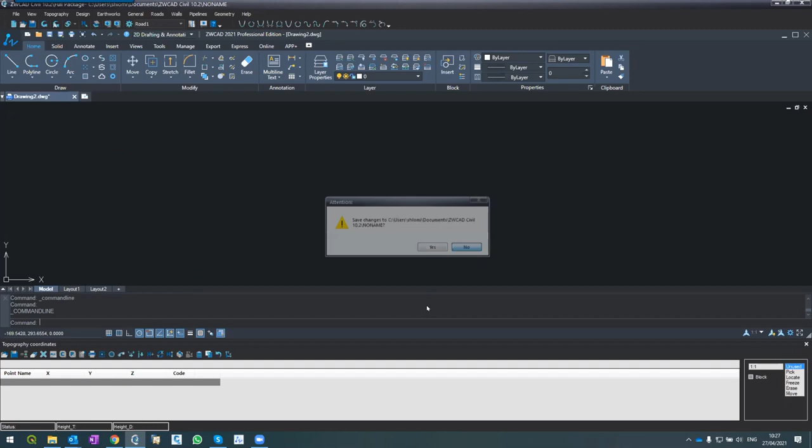So the last training was about roads design. What we did, we started with a new project. Then in documents, we went into ZWCAD Civil 10, we went into samples, and then we went to sample 7. Sorry - okay, new project. We opened a new project, it's my mistake.

I opened a new folder and I will call it Roads Design 2. Inside the folder, I opened the project. Then we have our own project. We've loaded a coordinates file - we do it here on the lower left button, we load the file of coordinates.

What I did, I went into ZWCAD Civil 10, which sits in your documents, go to samples, go into sample 7, and read the file named sample 7 TCO, which is a coordinate file. Now I've gotten it here in the list. To see it, I press the refresh button, it's here on the top left. And I've gotten my map.

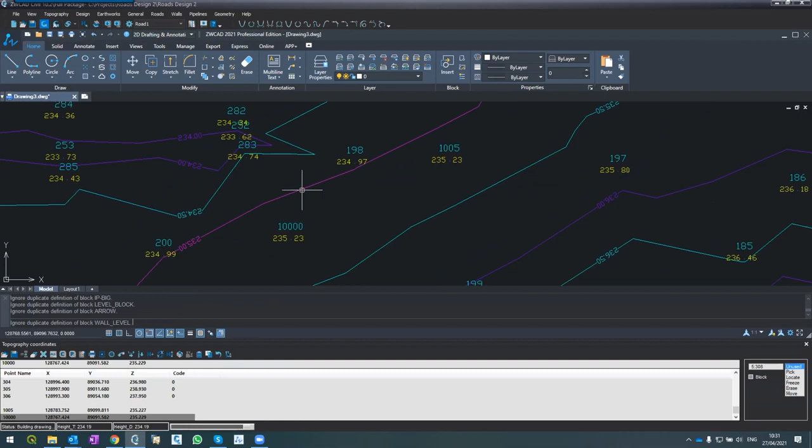Any questions so far? I think this is quite simple. Let me continue, please bear with me.

Now it goes to roads. Every road starts with the horizontal alignment, which means the layout, how the road goes, the alignment of the road. In fact, all of us know that the best road is a straight line connecting from point A to point B. So for example, if I want to create a road that goes from this point to this point...

Let me open a new layer and call it center line. It can have any name you want, I chose center line because we call center line to the center of the road, what describes the center of the road. I'll give it a color, red, or you know what, yellow, and I'll make it the current layer.

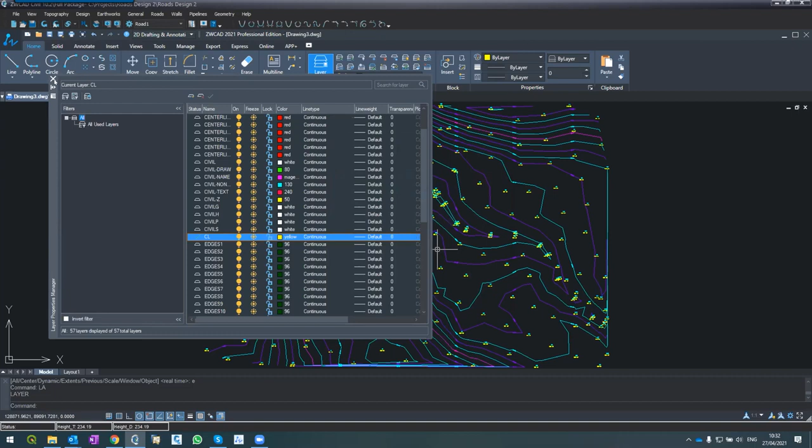If I want to connect this point to this point, I can do a straight line, right? So how do I do it? I do a polyline, standard polyline in AutoCAD, or ZWCAD, from here to here. Obviously, if I want to connect these two sides, this is the best road because it's the fastest.

But maybe Jimmy, can you tell me what is the problem with this road? Why shouldn't I go this way? Or what can be the problem with such a road? Any idea, Jimmy? No idea? Anyone else?

Probably the cut and fill. Exactly, thank you very much. Who was it, Nilo? Yeah, Nilo. Yes, thank you Nilo. Exactly, this is the problem.

Because if I go straight like this, this is only the center line. Now the road will go wider, like 5 meters here plus 3.5 meters like this and 1.5 meters, and then I will start cut and fill here. You see, there are contour lines here, there's a small hill here.

And that's a problem. Now it depends, we can still go by this road, but it means we are cutting here. Or I can change my road and do another one. Let's connect another one that goes from here to here to here.

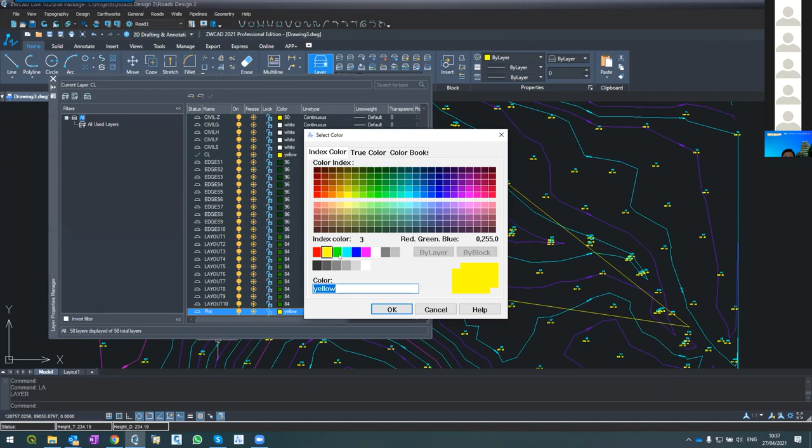Okay, I want to go in a straight line, but there is a house here, and plots of private people here. So if I go through their plot, they will not allow me, or they will ask for big compensation.

Usually in many countries, the law does not allow owners to prevent roads going through their location, depending on physical planning. But if you go through a private property, then you have to pay compensation, and the government pays it. This makes the project more expensive, and affects statutory design. We have to redesign and come to a settlement with the owners, but we are going through their plots, and this can also affect things.

So I'm just giving you several examples of what can affect our road alignment. We talked about natural behavior, like earthworks and the effect on the environment. Parks and nature can affect it too - for example, if there's a national park here, maybe it will not allow us to go through it. Private lands, other obstacles, maybe there's a big monument here which nobody will allow us to move. Drainage, and so on and so forth. So all this affects our alignment.

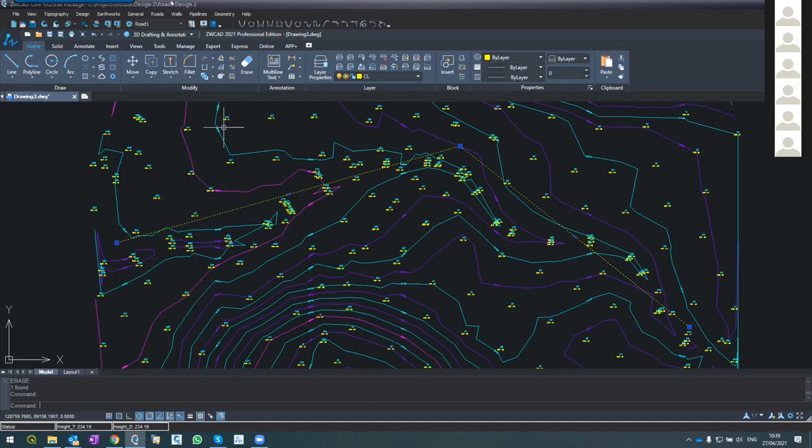So just for our example, let me design my road this way. What I did, I created a polyline, but for now it's just a simple 2D polyline. To convert it into a road, I'm going to roads, horizontal alignment.

See what happened - first of all, the list below changed from topography to design. It says design coordinates, and I can flip between them. Go into topography, I see the topography. Go into design, I see the design. So I can flip between topography and design coordinates. On the right hand, I see the horizontal alignment window where I can define my road.

He asked me, what is the first road, road 1? I'm picking select on the right. See what happened in the command line - it asks to enter an option, polyline or segments. We will use polyline because we have a polyline here, so I press enter for the polyline. It asks me to select the object - I select the object, one object found, press enter.

See what happened now - the 3 coordinates that define this road, the first, second, and third, we call them IPs, intersection points. They appear both here with coordinates and description of the road, IP 0, 1, and 2. If I press apply, we'll see the system actually converted this - press apply, OK again.

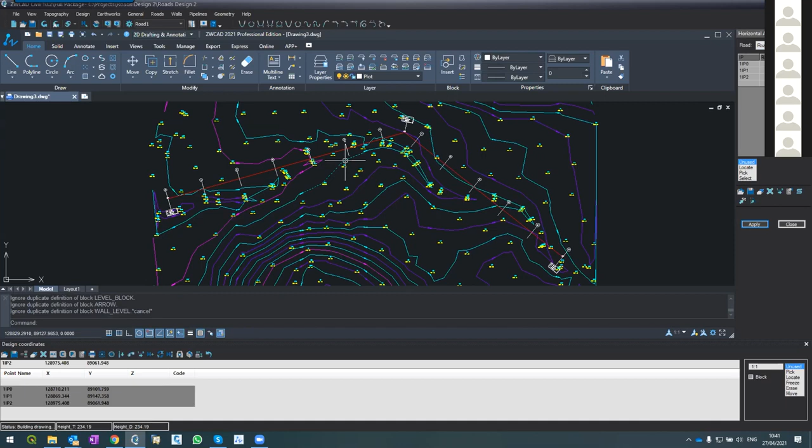This is now a road model or road element. I don't know if you're familiar with the term BIM, building information modeling, but this is exactly what we're talking about when we talk about BIM. This polyline is not anymore a polyline - it's a BIM model, a 3D BIM model.

For now, it only includes the road, but only includes the horizontal alignment. It's not in 3D yet, but it's already a model. It's a model, it's a road. We can see the coordinates of the road, and we can see the cross sections of the road, 0, 1, 2.

By the way, if I press apply again and tell the software to show me the distances, it will show me the distance between cross sections. Let's see - so 25, 25. So this is already a BIM model of the road.

For now, it only has the horizontal alignment. These are the coordinates. Now we know, of course, that if a car goes from here, unless this is a junction, it has to turn here. So either we put a junction here or we just put a radius. Let's put a radius of, let's try, 150 meters. So how do I do it?

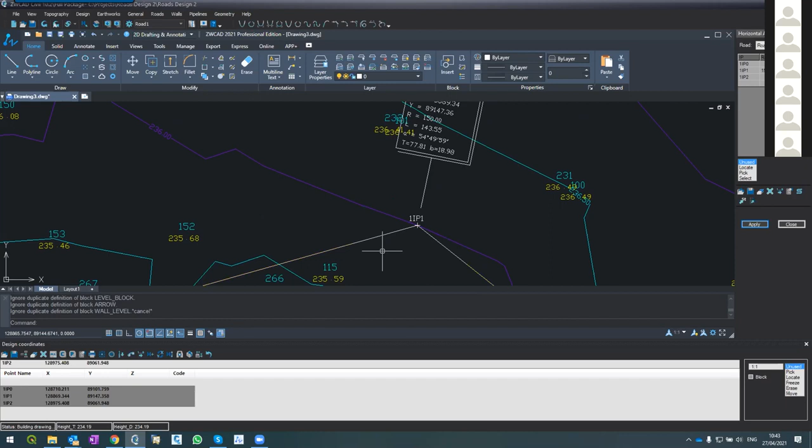See what happened - automatically the system used the 150 meter radius and changed the road accordingly. The starting point of the radius we call the tangent point, between this straight line and this radius. The software calculated it to be here - it took the 150 meters, found how to fit it, and came up with this tangent point.

So from here we are starting - if you're driving a car, next time you'll notice when you drive, this is straight, and when you're going into the radius or turning right a little bit, this is the starting point. From here, what will happen? I don't know - Sheena, can you assume what will happen to the car starting from the radius? What will we feel? Any idea?

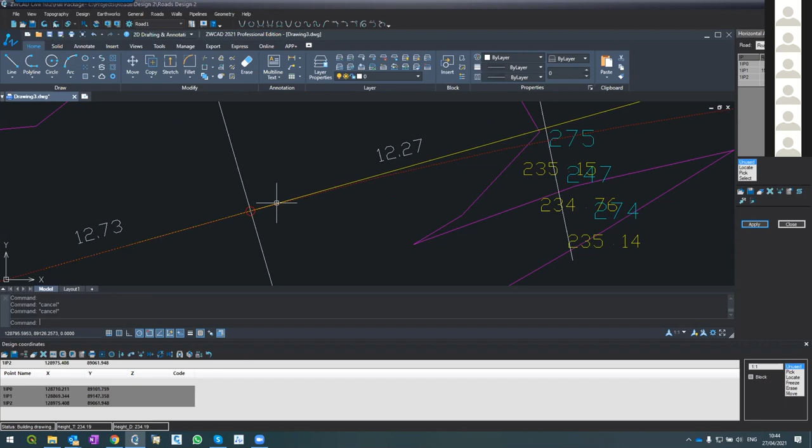Super elevation will be the implication, but what we feel is the centrifugal force - sorry, I said gravity, it's centrifugal force, my mistake. Centrifugal force on the car, out of the circle, out of the radius.

So if the car drives like this, starts turning right. For example, let me show you something. This is my car, right? So if this car is driving here, it drives like this, in this direction.

When it starts turning right here, there would be a force which will go this direction. It will start feeling the radius. The faster it goes, the bigger the radius - bigger radius, lower force.

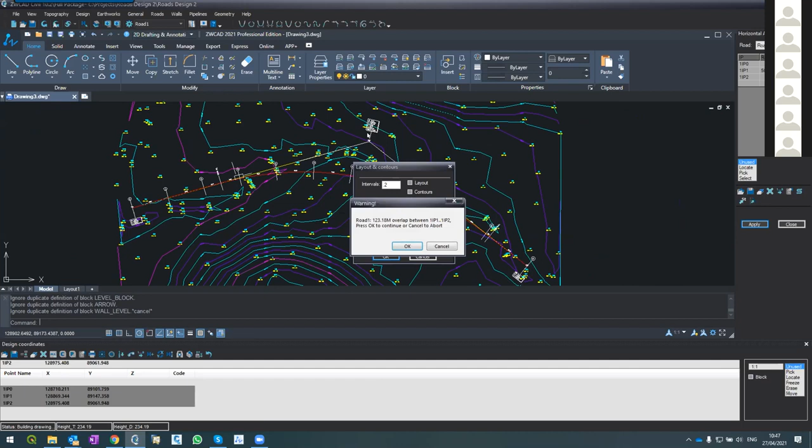Road 1, there is an overlap. When I do 500 meters, it's too big. There's an overlap between this IP and this IP, and this IP and this IP. You'll see it in a minute. There's no geometric solution, so the system alerted - see what will happen. You see? This is 500 meters. There's an overlap, so we cannot use it.

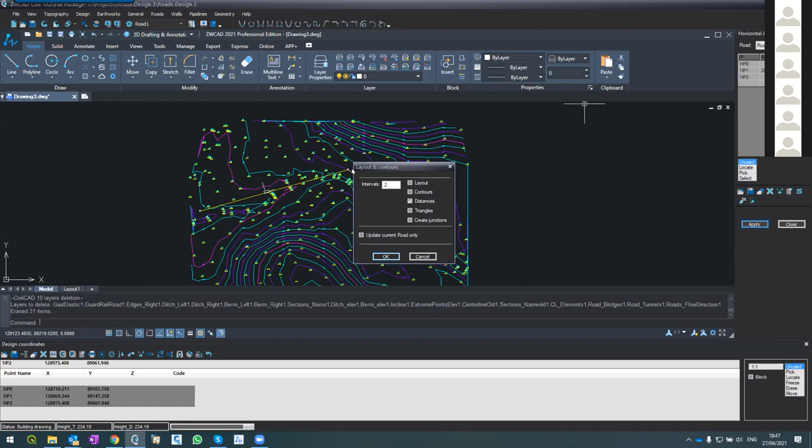So I will go back to 200 meters, and that means the speed limit here would be maybe 70 kilometers per hour, depending on which standard we use. Okay, so I use 200. About super elevation, we'll talk about it in this lesson. Super elevation is the way to compensate for the centrifugal force by entering a crossing slope, but we'll see it very soon. I hope what I explained is clear.

So in very short, when I click select here, select the polyline and press enter, I converted it into a beam - for now, a beam with horizontal alignment only. That means the data shows here, and that means I can enter radius and change the radius of the road. This is what it means. By the way, I have some additional information which I can enter here.

We call it transition curves, or in other words, clothoids. This is more likely to be shown in highways, where the speed is very fast, and therefore a car going this direction at 120 kilometers per hour - at this point, immediately the centrifugal force will be in full force on the car. So the effect on the driver would be fast and strong.

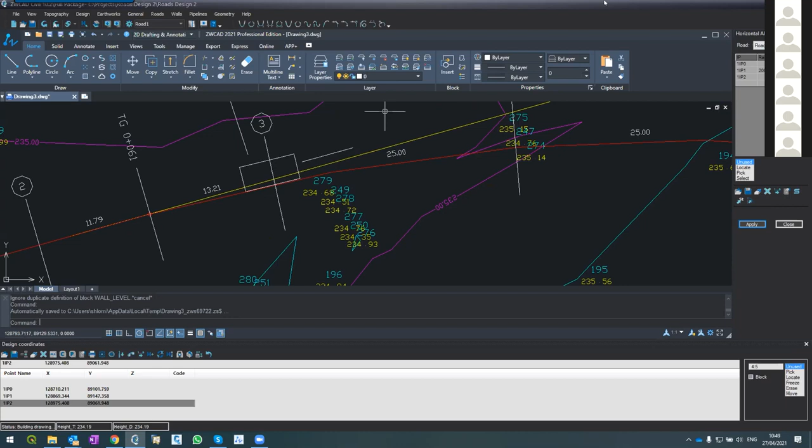So usually we smooth the transition. For example, I can enter what we call a 40-meter transition here. Let's see if there's a geometric solution for it. Let's see it. Otherwise, something will alert - you see what happened? Instead of tangent, we have what we call a transition curve, a transition spiral. This is now not a regular curve, we call it spiral, or also called a clothoid. Clothoid is a geometric solution of a transition

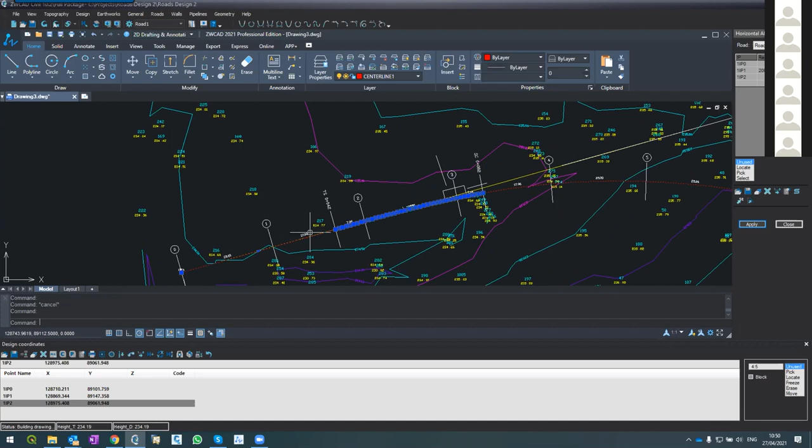between this point and this point. We are transitioning the curve from here to here. What's so unique about this element is that the radius here is 0, or infinity if you like - it's the same, so there's no centrifugal force. Here it starts changing - at each point like this, the radius is getting bigger. Here it will be 200, here it will be 0. The clothoid geometric definition is that it's transiting slowly, gradually from 0 to 200. So the driver will feel here the change will not be that dramatic. This is why we create transition curves.

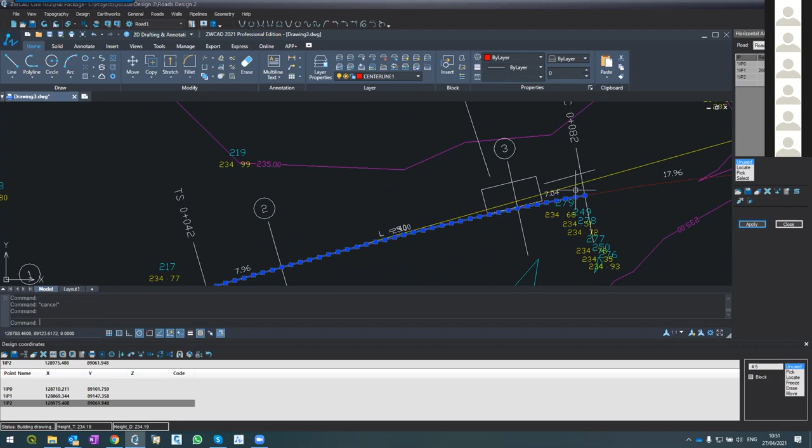I hope you got it. What the software shows you is that the TS is the tangent from here to the spiral, and here from the spiral into the curve. And here again, usually when we do a transition, we do the same when we are going this way, so I'll put 40 here as well and press apply.

Now I'll get the same thing here. Okay, so I have a spiral from here to here. I hope this is clear. Any question about this one?

Any questions about this one? No questions, I assume the silence is no question. Nilo, can you follow? Yes. Hatik, can you follow? Hatike, my question is, can I? Hello, yes, I can follow. Okay, who asked the question? Jimmy, yes, please Jimmy.

We can still design our road without transition curve, right? If we are following only the radius without the transition values. Of course we can, but it has implications, depending on the speed limit on the road. If the road is an urban road with slow speed, let's say 80 km/h, then usually we don't use it. Depends, we can use it or we cannot use it.

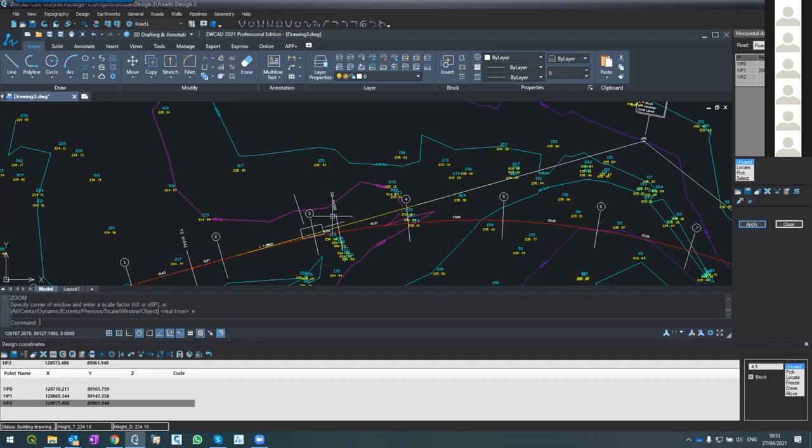The reason for not using transition curve can be some, I can give you some ideas. One is because it's more difficult to construct, because the spiral itself is not a linear definition. Second will be probably because it affects our geometry, and we talked before about the limitation of the geometry. For example, the preference to have a straight line instead of a curve from the first place. So this also limits the geometry. Usually these are two reasons, maybe others, that limit us from putting transition curve, and then we use standard radius.

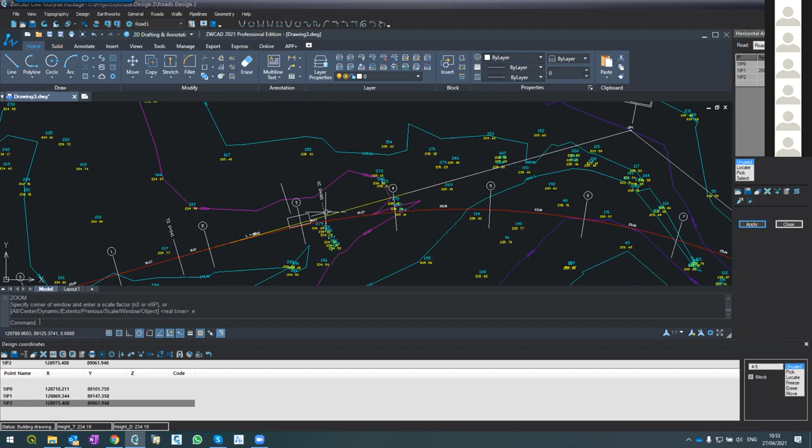But in highways where the speed is very fast and you enter the radius again, for example if this will be a curve and this is a highway with a speed limit of 120 km/h, usually we put a transition curve. But if the radius would be, for example, 5,000, then the centrifugal force on the car will not be that much, so the importance of the transition is not that critical. But again, I'm talking about road design, but I'm trying to limit myself now to the software and not to general civil engineering.

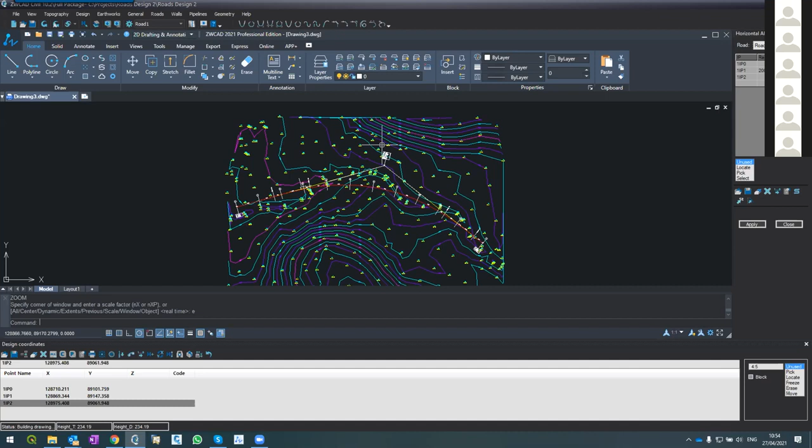More things about the software. First of all, whenever we design the road, the software shows me here more data. It shows me the X, Y coordinate. It shows me the radius. It shows me the length of spiral if I have one. It shows me, I think, what we call L, the length from here to the tangent. I think this distance is what is 150, as far as I remember.

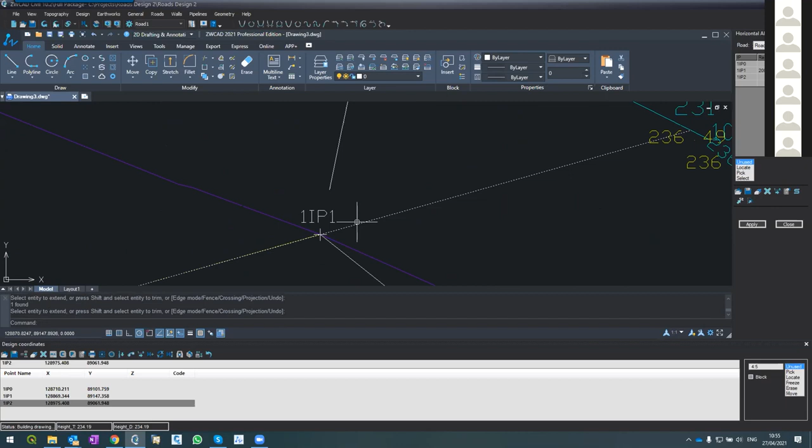And it shows me the transition angle, which is the angle created here. If I would have extended this one, this is the angle, which is the turning angle. So here the angle is 54 degrees. These are data for the road.

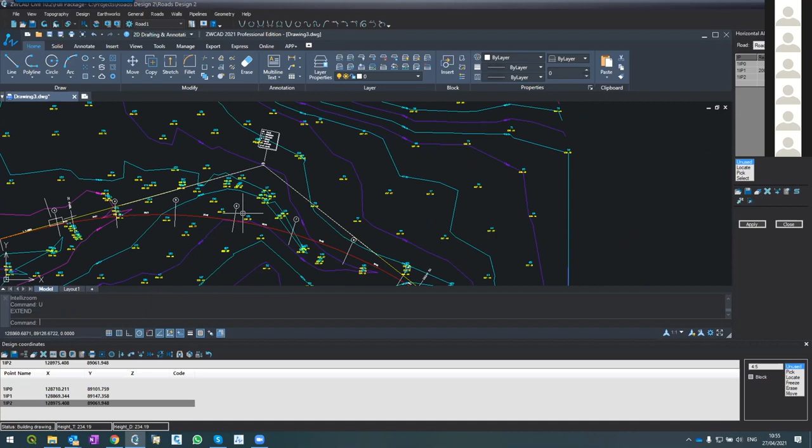What else? If I go to, by the way, it's too much graphic, let me go into layers and go to civil and do like this, so I don't need the points. If I go to options, I have many definitions here. One of them, for example, is to change the display. Instead of having the road 0, 1, 2, 3, 4, if I go here and go to define sections and change this from format 1 to format 2, and press OK, and press OK again and apply...

You can see that now, instead of numbers, I see the running distance of the cross section. So it depends on how you want to show it. See 50, 75, 100, 125, and so on and so forth. It's a matter of how you want to display it. There's no one standard for it.

How do you want to create this road, the center line, as a 2D polyline, like we saw, or a 3D polyline? Advantages are many. 2D elements are easier to cut, trim, everything, but 3D polyline will show me the road in 3D if we change it, so you can change it.

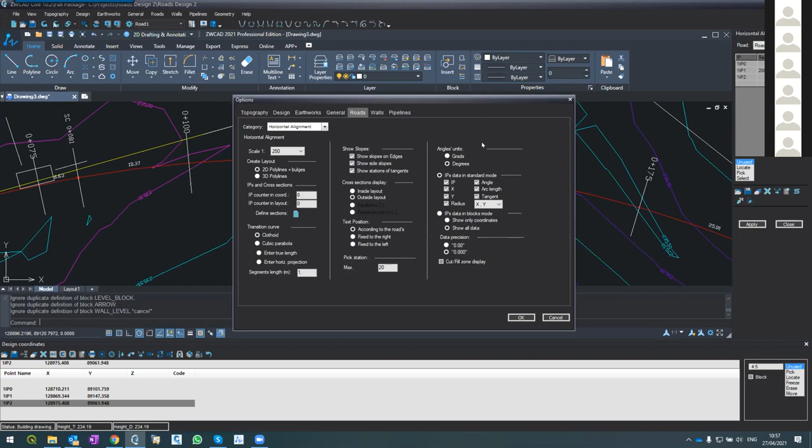You remember the transition, now we're using clothoid. We can also enter cubic parabola. Again, why to use cubic parabola depends on countries and regulations, and so on and so forth. There are many, I'm not gonna talk about all of them, but I think it's important.

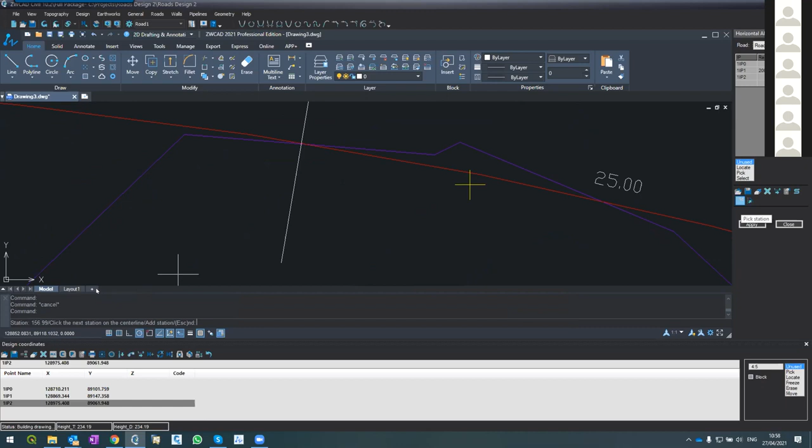Another thing is, for example, this button. I can click this button and click here, and the software shows me that this point, the projection or perpendicular of this point on the road, is at a running distance of 156.99 from the beginning of the road. So if I want to measure the running distance at a specific point, I can click here. This is 115. You see, this is 110, this is 125, this is 115.24. So I have many tricks here.

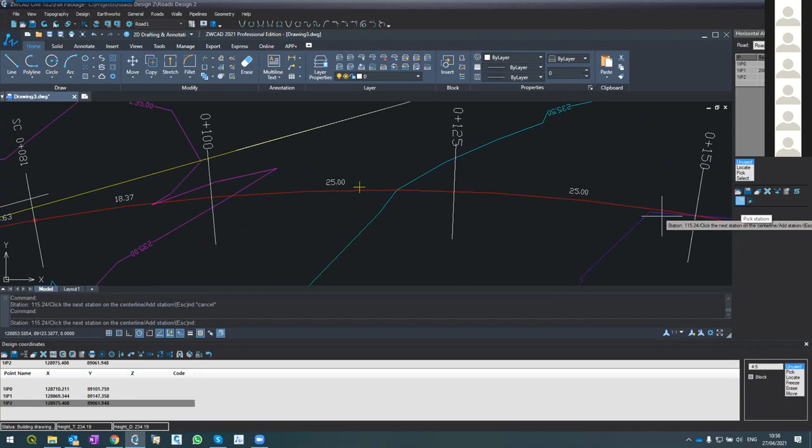It's not that important at this stage.

What was 200, and 40 and 40. Oh, you see what happened? Since the curve is bigger, there's an overlap.

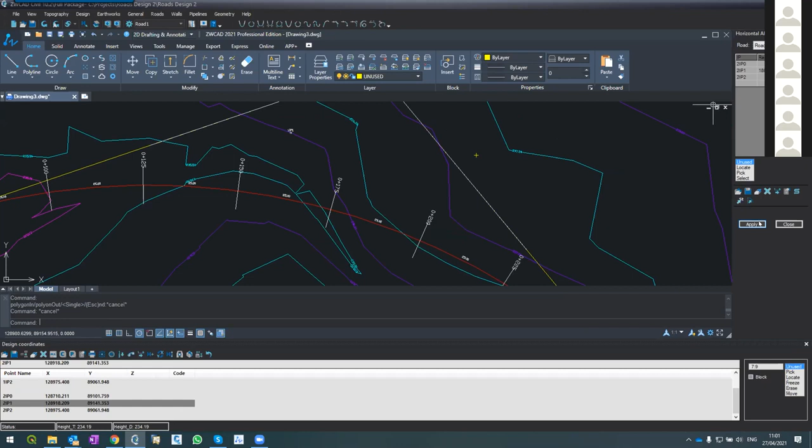The software now recalculates, you see, one IP, and recalculates this IP's coordinates. These IP coordinates change to this location. If I go to the right and press apply, and apply again, automatically the beam has been updated, but again we have the radius, the overlap problem, because this new geometry created new challenges.

We'll fix it in a minute, but just for you to see. See what happened? I changed it to here. I don't need this polyline anymore. Now I'm using move to change the coordinates here, and the beam automatically updates accordingly. See? This is the overlap which we saw.

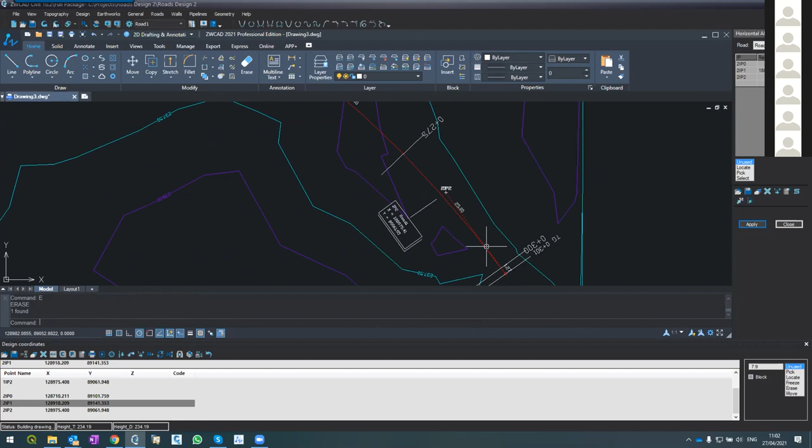So let's change it now to be 150, maybe it will be enough. Let's see, actually the software will tell me. Yeah, it's enough.

Okay, any questions so far, guys? Because I finished with horizontal alignment and I'm moving to the next thing. Sheena, can you follow? Yes. Don't you have any questions? No questions. Okay, okay.

So before I continue, I want all of you to take like 10 minutes and do the same practice. It's very simple, what I want you to do I will write down in the chat. So all of you, one, start a new project and name it road 2. You can put it in a folder, put it in a new folder.

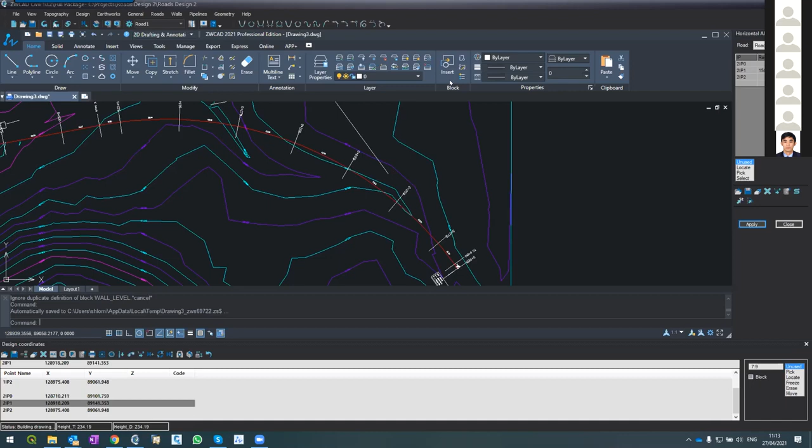Okay guys, I think we should continue. Jimmy, can you share your screen for us to see, to learn? Let me allow you to share your screen. Okay, I'll share. Because all of us should learn, and I want to see it easy on my screen because I'm doing it perfectly.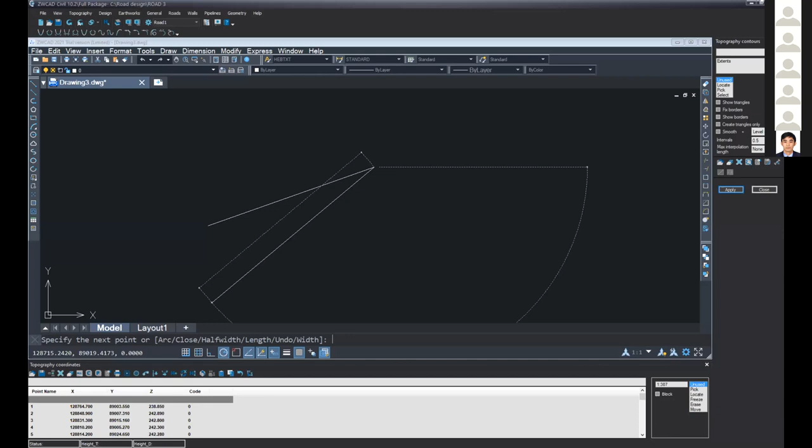Okay, where is your contour line? Where are your contours, contour lines? How to draw the polyline, the road, then it disappears. Okay, one second. Somehow your point disappeared? The contour line, the contour lines. What about your point? Yes, everything.

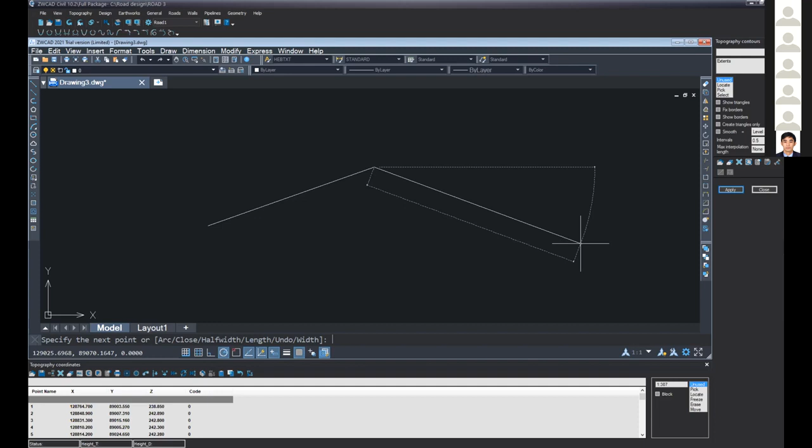Okay, let's do like this. Press escape. Go to one of the points below. Click on it. Yes, now go to the first. You see that the point is now in the editing row. The point itself, yes, above is editing row, no, below? Yes, okay.

You know, go to the end and enter a space, or go to the one and change it, remove the one, and something to show the system that you have done a change. Remove one and enter one again. I've done that, and enter one again. Okay, yes, what you did right now, if you refresh, the system will think that there is a change, and refresh the layer.

Oh, the contour line is back. Okay, yeah, one second, there's a delay, we don't see. Okay, you see what happened? So yes, I don't know why they disappeared, but if you want to make the system refresh or recreate the layer, if you just press refresh, the system will not know you have a problem. So you have to tell the software you changed something in the list and then refresh, and automatically the system knows there is a change in the list. I need to recreate the layers.

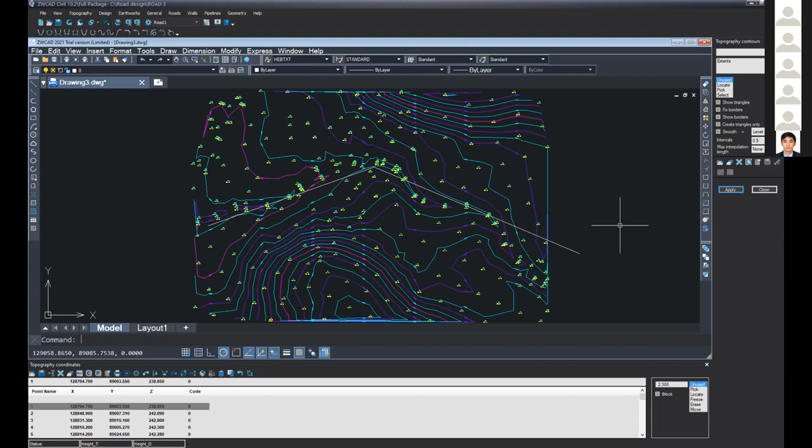Okay, continue with the horizontal alignment. Your horizontal alignment is not so good because you are going out of the contour line. So just fix it and continue.

Maybe we'll learn together. Can you see now? Can you see my screen? Yes, I have already imported the coordinates now. Good, continue, I'm at that position.

But I can't see now. Okay, you see you have the same problem. Yeah, first of all try to zoom extend, first of all. In the command line, zoom to extend. Command line, zoom to extend, you know how to zoom to extend, right? Zoom, yes, enter, E, enter.

E. Excellent, yes, it's Turkish, you know. Turkish, yeah. Just zoom to extend, you know, maybe you do it from the buttons, whatever you want.

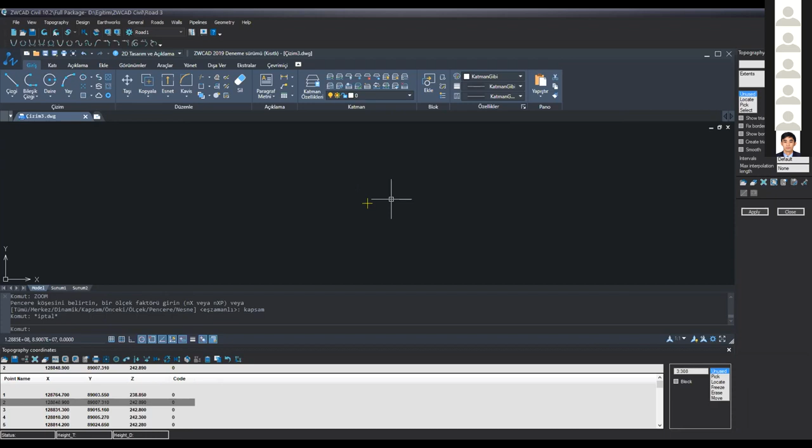Nothing on your points, very strange, very strange. You know what you can do? Maybe, go to number 2 for example in the list below. Yeah, and you see you have a button with a target icon. This one, yes. This is where the point was supposed to be, but it's not showing. Okay, try to create contours, let's see what happens now.

At that point, it's locked. I see, okay, this is one of the things maybe we'll ask our technical team to have a look, because I think it has something to do with the language. I'm almost sure, it's conflicting with the language. So it's something we can sort out, but we need to take control, maybe later on. Okay, yeah, okay, we can take it later. Yeah, is this the first time it's happening, or has it happened to you in the past as well? Yes, in the past I have the same issue lots of times. Okay, okay, it's an issue of the Turkish version, so we'll have a look and sort it out. Okay? Okay, thanks.

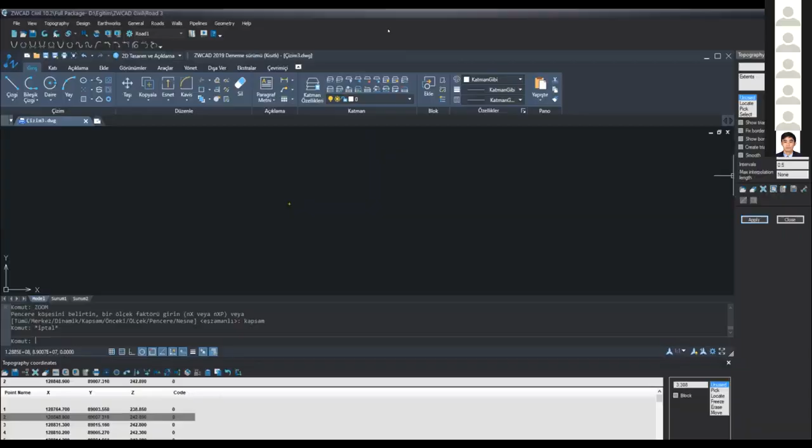What about Nilo? Can you show your screen? Oh, wait.

Can you see my screen now? Oh, nice. So what about the road? Continue with the road.

I'm trying to do the horizontal alignment right now. Yeah, but where's your command line? Why aren't you using the command line?

Okay, do like this. Click somewhere in the drawing, then press escape. Cancel. Now show your command line. Do you know how to do it?

Type in command. Command line, yeah, here it is. No, you saw it in the list. Type command again, you see, pick the first one. It doesn't do anything.

Try to write command line. Still the same. Can you click on the X of the topography coordinates window, the one that you showed before? No, the X, close the window below, the topography coordinates window. Yes, close it.

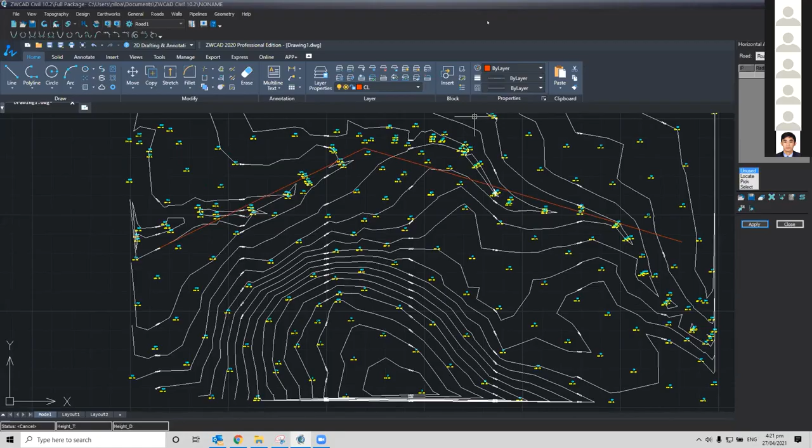Yeah. Sheena, how are you? Yes, hello. Can you share your screen? Okay.

Hi, can you see my screen? One second, I see something. Yes, I can. Oh, perfect. So I think you are okay. Okay, thank you. You didn't encounter any problems? Okay, yes, no.

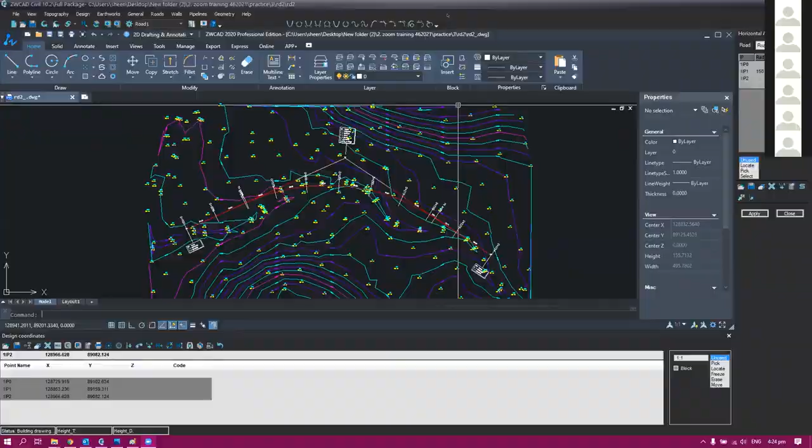Nilo, I think you should use Control+9. Control+9, it's supposed to restore your command line. Wait. Yeah, Control 9. Are you sure your focus is in the drawing? Yep. Because it works on my computer. Control 9, not Control Function 9. Control 9, okay, okay, so it works?

It's been minimized, that's why I can't see it. Yeah, do you want to share? Can you share your screen? I'm sharing my screen now. Okay, good, you have the command line.

Very good. Okay, so go and make the command line a little smaller so it won't take much space. And go to Design, sorry, Roads, Horizontal Alignment. Okay, wait.

Good, then select. Select, right? Yes, select. Then, oh, where's your command line? It disappeared again. Press escape and then Control 9. It's very strange. Did you press Control 9? I did, and the focus now is on the drawing, right? Yes. Now click somewhere in the drawing and press Control 9 again.

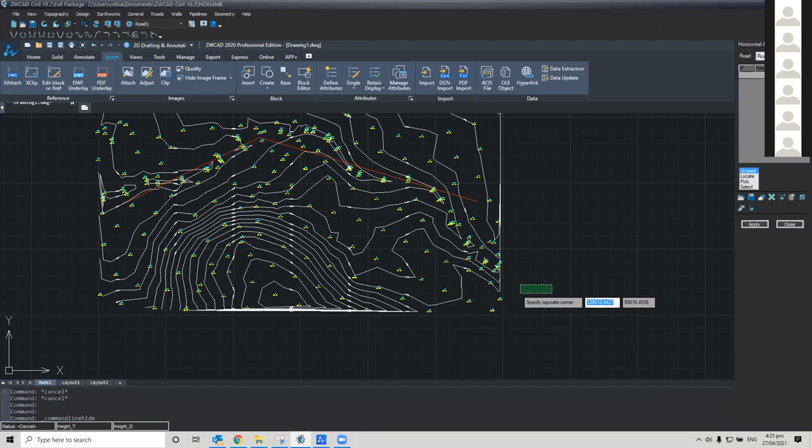I got it. Okay, what you can do is try to close the design coordinates window now. Okay, I see. And just select now, yeah, continue like this. Select, enter, and enter. Good, apply. And mark the distance and press OK.

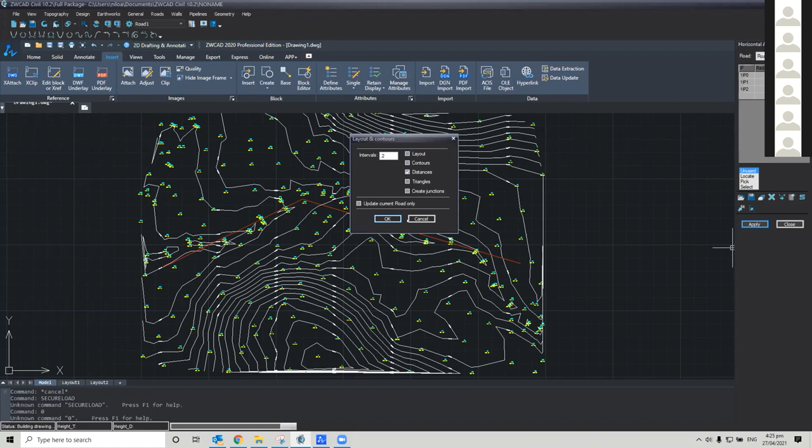Now, what I would advise later on, I think it's something connected with the docking of the command line. So when we finish, try to see how you can dock it. Yeah, okay, it's something about docking the command line somehow. Okay, but if the problem persists, let us know.

Change the entry radius, let's say 100 meters. Then how about this spiral curve? No need. Okay. Hey, there you go, okay good.

This is all right. Go to options and change options. On the right, you have a button, options, the one with the hand holding a paper. Oh, where is it? Yeah, where you are, very close to where you are. Now, first row, and another one to the right, another one to the right, more.

Yeah, okay, and go to Define Sections, you see the button? Define Sections, this one, yes. And change from format 1 to format 2. What's the difference between the, okay. Format 1 is when we see serial number. Format 2 is when we see running distance.

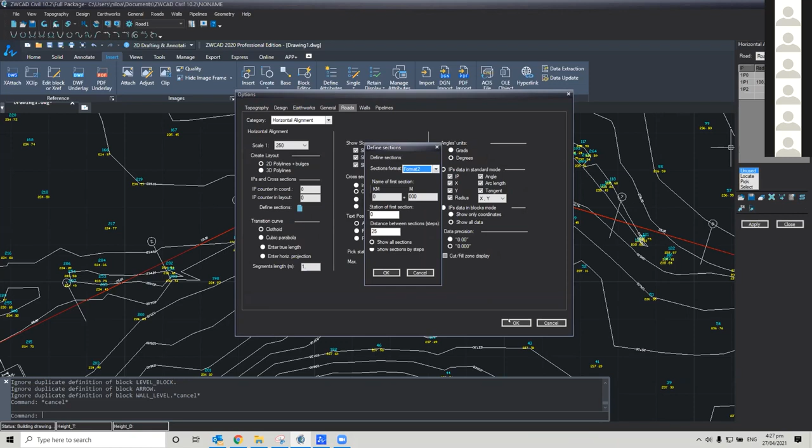Okay, yeah, press OK and apply the change. Apply, yeah, let's see. Good, okay. One of the problems is that you are now working on 'no name' - see on the top, you are in project no name? Yeah, oh okay, it was a mistake. So what you do now is go to File, Save As.

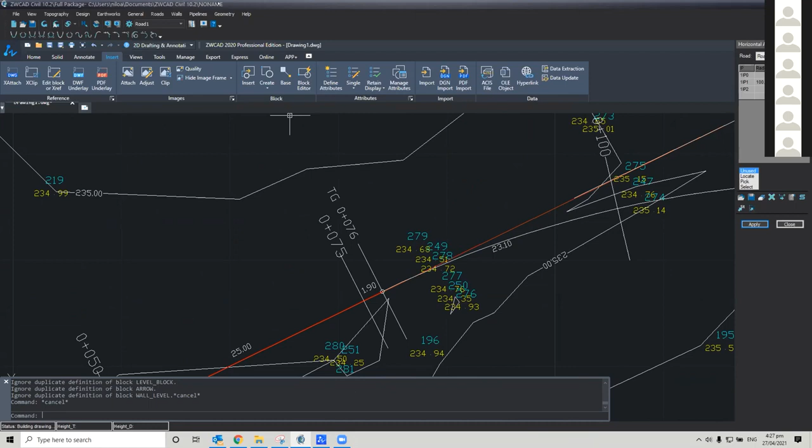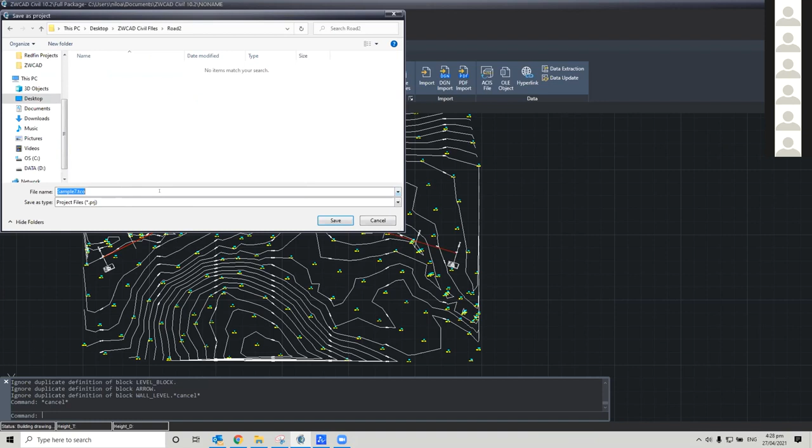Save it somewhere. Road2, usually I create subfolders. Road2, and Road2, and I'll save.

Now all of us are on the same page. You are also on the same page. Gian has the same problem like you with the command line.

What I would advise you to do is two things. First, try to see if you can dock the command line. Second, you can use 2021 if you have it. There shouldn't be any problem. All our training we do with 2021.

So what can happen, maybe, I want to show you something, to remind you. Someone needs to mute. Okay, I want to show you something, to remind you something. Do you see my screen, all of you? Yes, I can see. Okay, thanks.

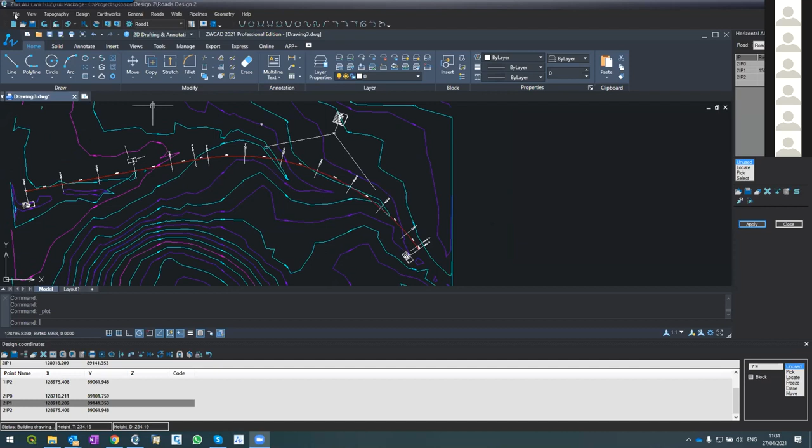If you have two systems installed on your computer, 2020 and 21 for example, and you want to choose which system to use, I want to remind you: go to File, open Prototype. In Prototype, go to File, Configuration. We studied it in the first lesson. Here we have to tell the software which ZWCAD version to use.

So it might be that before you had 2021 installed, but here it was set differently. Then the software didn't know how to work with it. So here you have to tell the software which ZWCAD version you use. Usually ZWCAD Civil has a system to automatically detect which kind of ZWCAD you use, but if it does not, this is the way to do it. You detect from here.

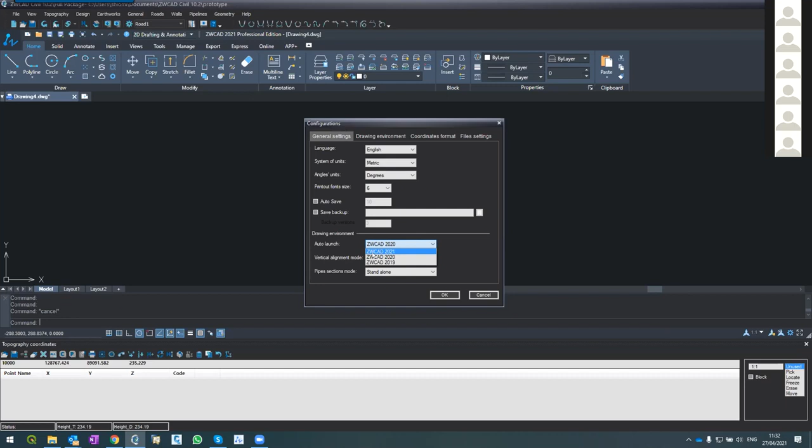If it's not automatically detected, you do it again: go to File, open the prototype, go to File, Configuration, and change here from 20 to 21, for example, like I do. Press OK, then exit and save. Now you've changed the system configuration in the prototype, so next time you launch your system, it will automatically launch the version you configured. I hope this is clear.

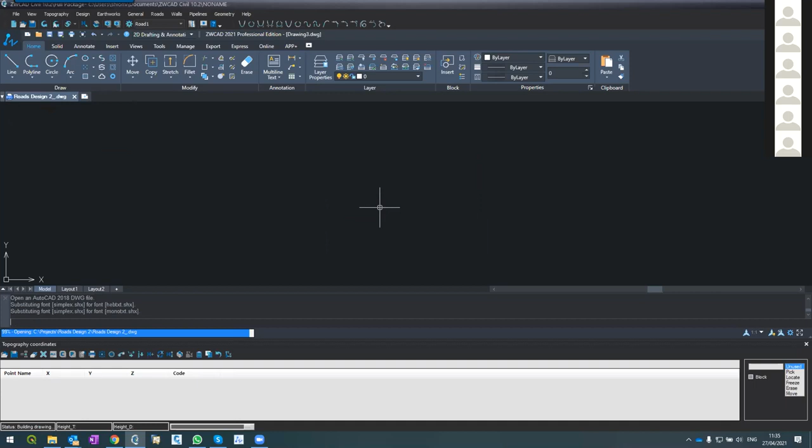But let's continue with our study. So we've been doing road design, and we have the horizontal alignment. The next thing is to design the profile of the road, what we call vertical alignment. We designed the horizontal; now we have to design the vertical alignment, the slopes of the road while driving.

So I'm going to Roads, Vertical Alignment. See what happened: the system automatically changed the menu, it's not the same menu, and it also changed and created another drawing. This is the first drawing, but now we are on the second drawing. The name of the drawing will always be Road Ver, it's a temporary drawing.

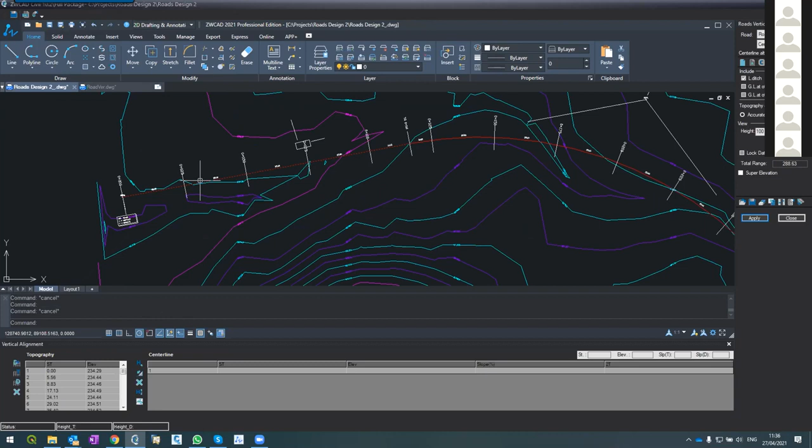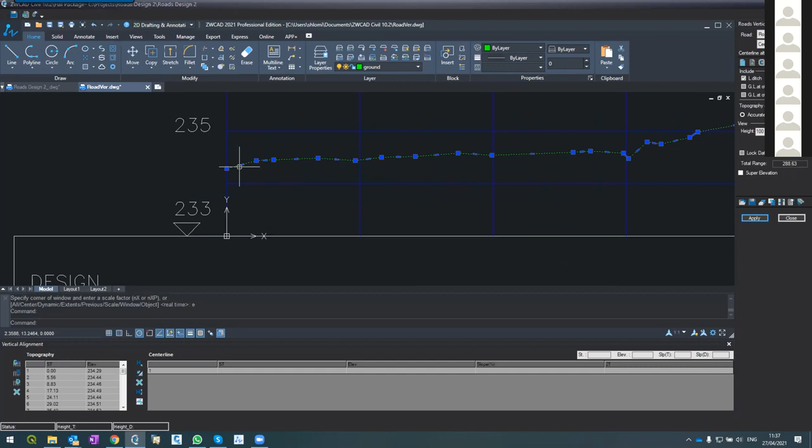It means, in the beginning at station 0, this was the elevation. After 5.56 meters, reading from here, there was a change in the surface, so the system automatically digitized the point. After 8.83, there was a change in the surface again, digitized the point. So all these changes in the surface were digitized one by one. I hope this is clear.

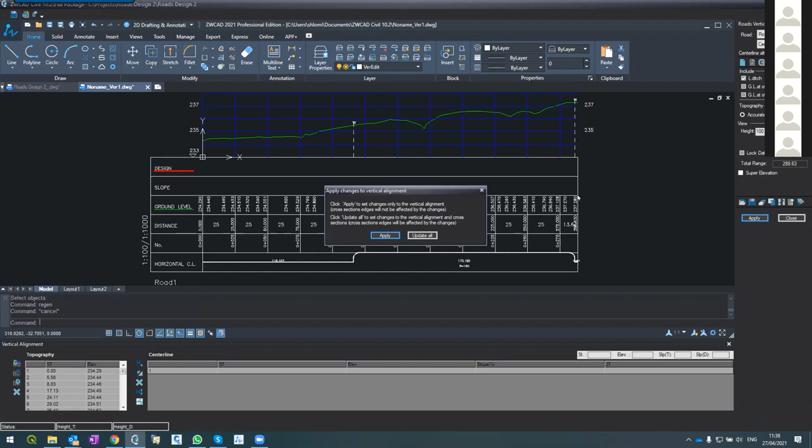Okay, so it was very simple. What I did: roads, vertical alignment, apply, and the system automatically cut the data, fill in the table on the lower left corner, and show me the drawing. If you don't see the drawing, go to zoom extends.

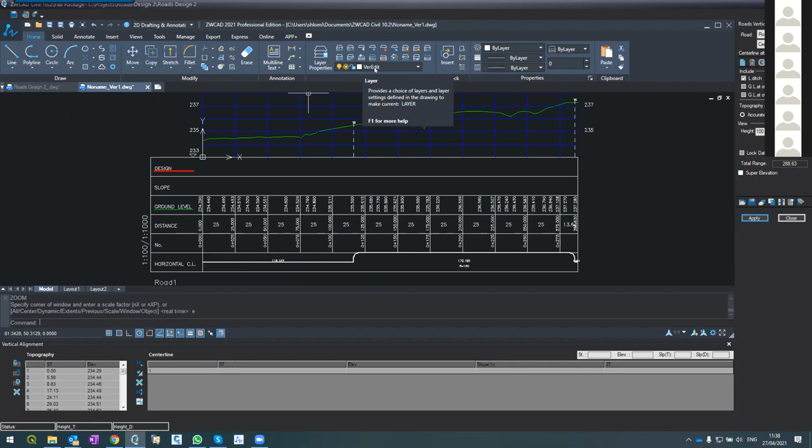Now let's continue with the design. When I used to draw the horizontal alignment, I had to create my own layer. I called it center line. In the vertical alignment, it's different. You don't have to create your own layer. The system automatically creates a layer named ver edit, which is the only layer that you can design your profile in.

So let me design, I'm starting from the beginning. I'm using Polyline in this ver edit, and I can start here, maybe in the ground, or I can start a little bit higher. You can see this is 1 meter, each blue line like this in the grid: 233, 234, 235, 236, 7, 8, so on and so forth.

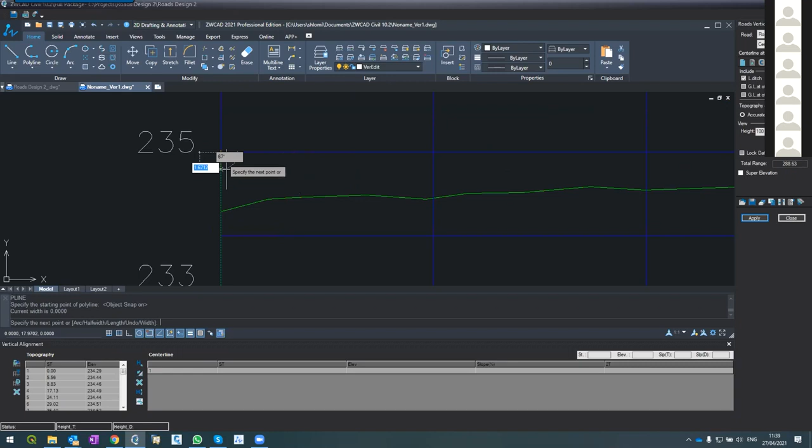So I will start here, 235. Let me use the object snap. This is where I want to start, a little bit feeling above the ground level, 80 cm or 70 cm above the ground. See, this is meter, so probably this is 70 cm. And from here,

I'm going with a straight line till I stick the ground here, let's say here. Let me see, I stick the ground, and from here, straight line, cutting a little bit, 237. This is my design.

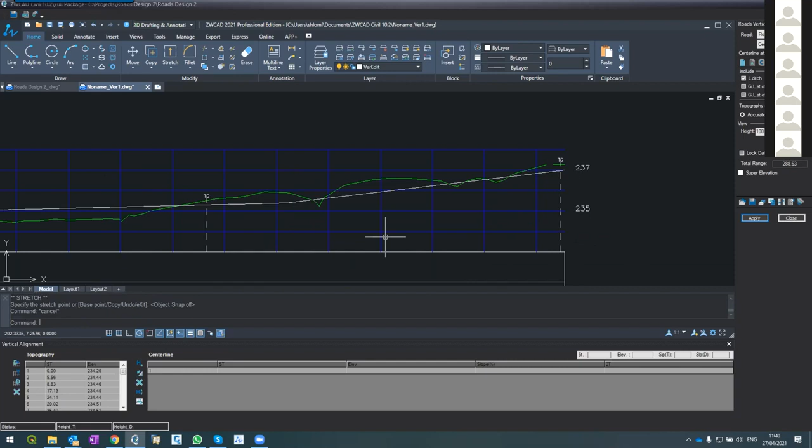Oh, it's almost a straight line. You know what, let me change it a little bit. Here, I'll stretch it. Let me remove the object snap, to here, and I press apply. See what happened? When you press apply, the system scans your drawing, scans the layer ver edit, and scans the polyline that sits in this layer, and converts this polyline into this table below, which shows running distance and the elevation, and of course the slope.

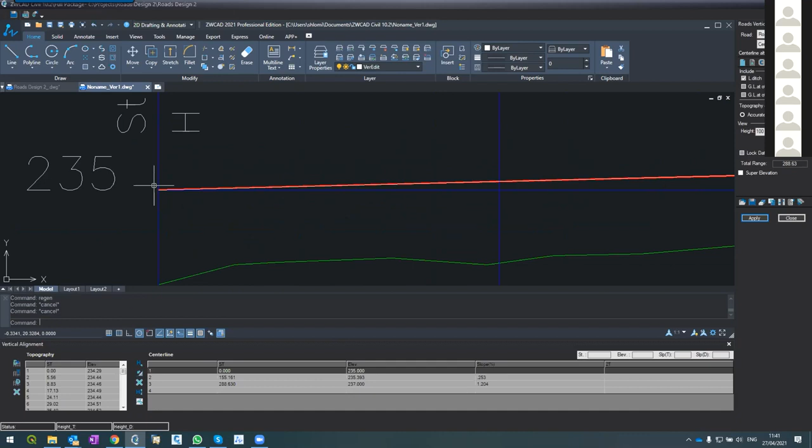So the system recognized that there are three vertices: one here in the beginning of the road, at the zero, and the elevation was 235. You remember, I used object snap. Another one here, after 155.161 meter, with the elevation of 235.393. And another one going here after 288.63 with this elevation.

And accordingly, the system calculates the slopes. This is a very small slope, 0.2%, so that is 20 cm different on each 100 meter, which is very small. I doubt that even the water can flow in this direction.

If I want to change it, because my fear is that the water will not be able to flow. It's supposed to flow this way, right? Because it's, yeah, it's supposed to flow this way, but it's very, very shallow, or small radius, or small slope.

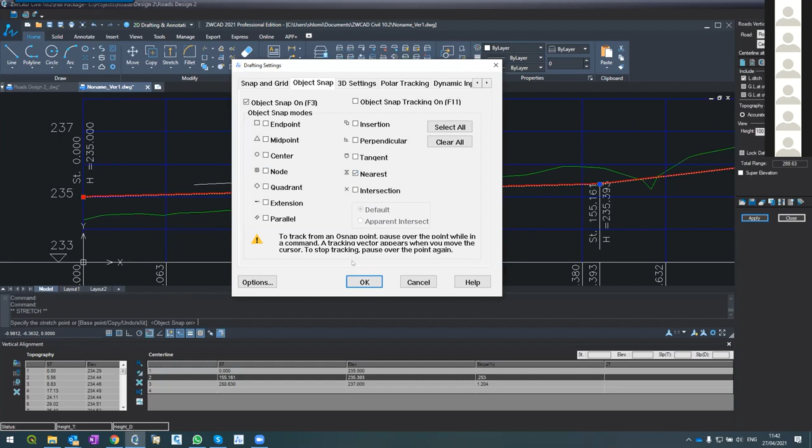What I can do, let me take this one and remove it. Maybe let me use the object snap and use the nearest, here. Let's see what happened, let's apply. Apply. See, oh, I probably did several.

Okay, somehow my polyline, maybe I entered more, so let me remove this one and this one. I'm not happy with them. How to remove? I can change the polyline, or I can go to the table: click on this line, go to the serial number, stand on the serial number and press delete in my keyboard. Same for this vertex. Let's press apply.

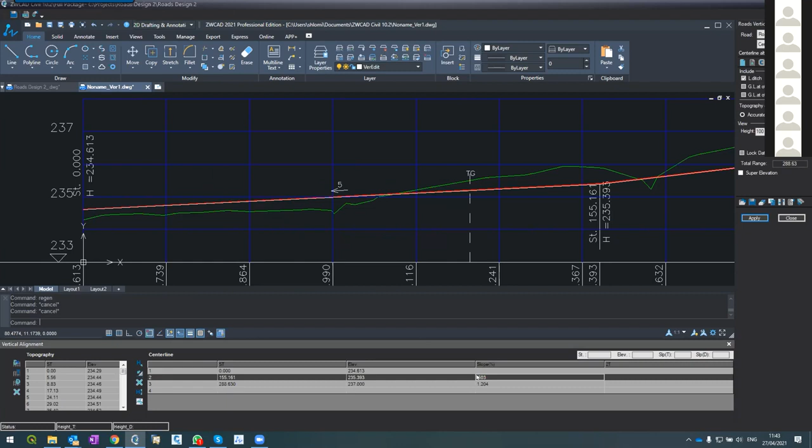See, it changed. Now the slope changed to 0.5%, which is more reasonable. The water can flow. I hope you got it.

So how do I work? I work either with the drawing or with the list here. A common mistake is to work with both. And I want to show you something: I came here and changed it to here. If I apply, it will work, no problem, this will change and the data in the table changes as well.

But a common mistake is to do something like this: change this, remove the object snap, here, and not press apply, not apply the change, and then change here. I would change something else here, let's say make it 1.6%. If I press apply now, the system will not know what to do, because it might create a conflict between what we draw and what we entered. So the resolution will always be that the data in the table overrides the data in the drawing.

So press apply now, you'll see that the system will not change. You see, it left the vertex here. Again, if we make a change in the drawing and a change in the table and apply, the system will always overwrite the table on top of the drawing.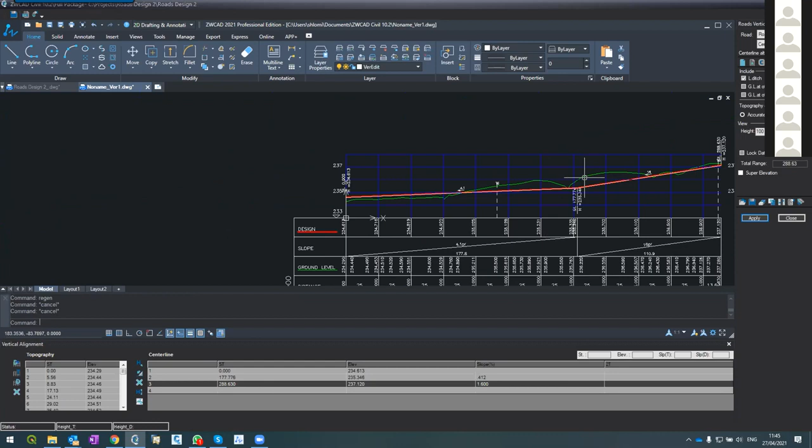What is the way forward? Every time you do a change, what is the way to solve it? Every time you do a change in the drawing, you do your change, press apply, and the effect changes. You do a change in the table, press apply, and it changes. This is the method, not together. So every time you do a change, you can do many changes. I can break it now, let me show you.

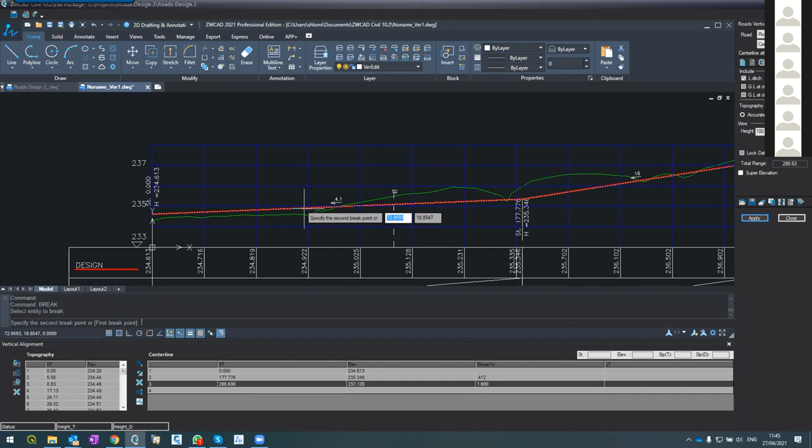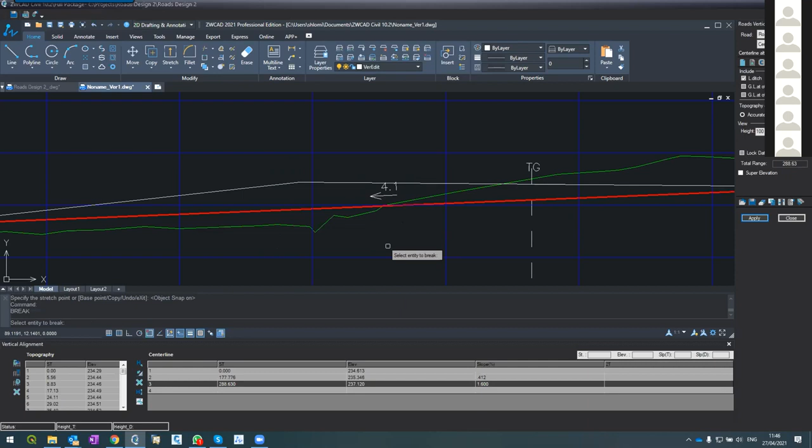I can stretch this one to here. This is what I want to do, create another point like this. I can do it, there's no problem. And press apply. And the software will do it, right? It's not a problem for the software.

Then if I want to change something in the table, I want to change this slope. You see, this is almost a straight slope, it says 0.86. I'm going into the table, change it to 0 minus 3, and press apply. So now it should go lower. See, 0 minus 3, this is okay. So we can work with the table and the drawing, but whenever you do a change in the drawing, press apply to change it.

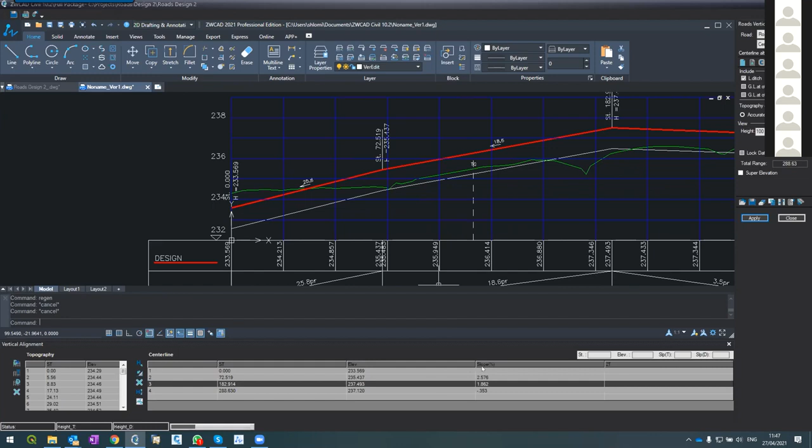Whenever you do a change in the table, you can do several changes in the drawing first. For example, I can take this down, and take this up like this. Okay, 2 changes in the drawing, there's no problem. But if I want to change something in the table, no, first of all I will apply, then go and change in the table. I hope this is clear. It's all about practicing.

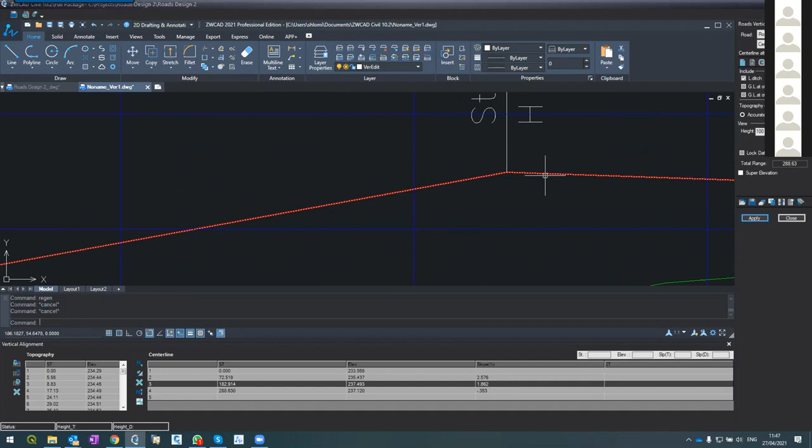It's all about practicing. Now let's continue. Now the car will drive this way. Here there's a bump, right? So we have to enter a vertical curve. Here the bump definitely will be felt. No road can be like that. So we have to enter what we call also a radius here.

Now on vertical alignment, usually we don't enter radius, we enter the curve length. This is the more practical way. We want to tell the software, look, this is our 25 meter, this is 25 meter, so the distance from here to here is 25 meters, and from here to here is 25 meters, so all of this is 50 meter. So I'm telling the software, create a 2Ts from here to here, the total length of 50 meter vertical curve, and the software automatically converts it into radius.

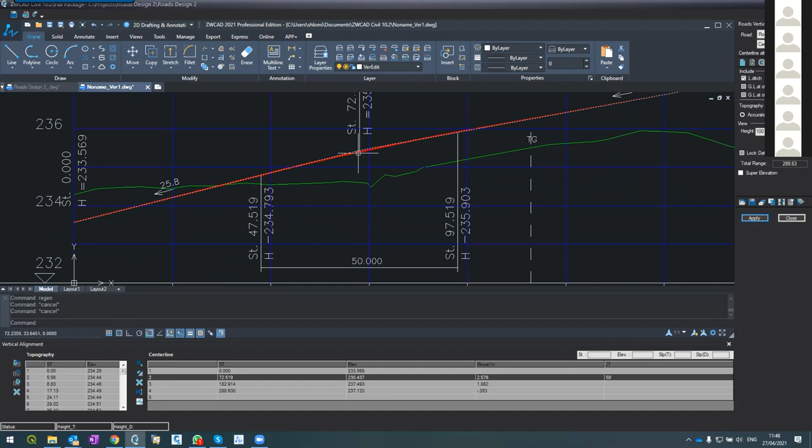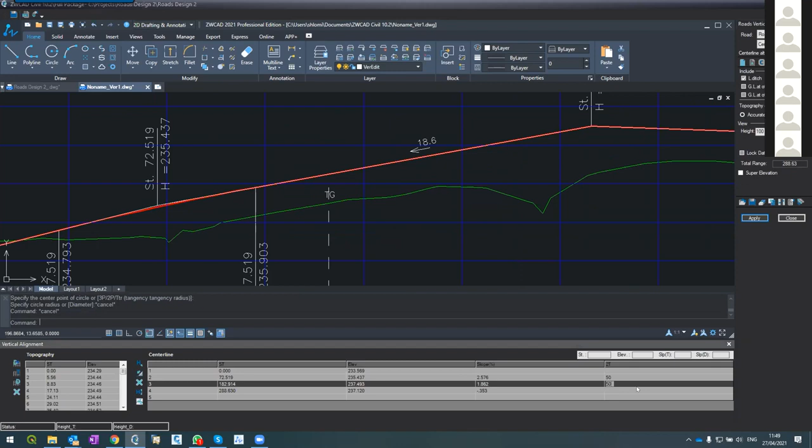You'll see it in a minute. You see what happened? The system automatically smoothed it into a radius. Actually, it's a very big radius, 7,000. It's very big, it's a circle of something like, I don't know, much bigger than this one, something like this. And the same goes here, here also 50 meter. Here it is, we change it.

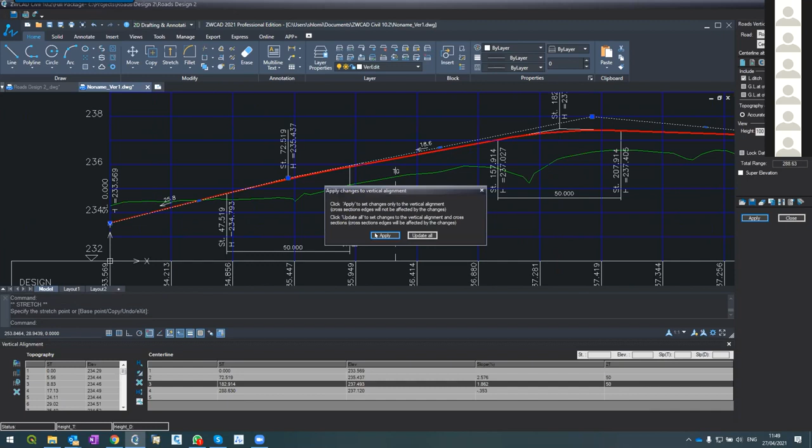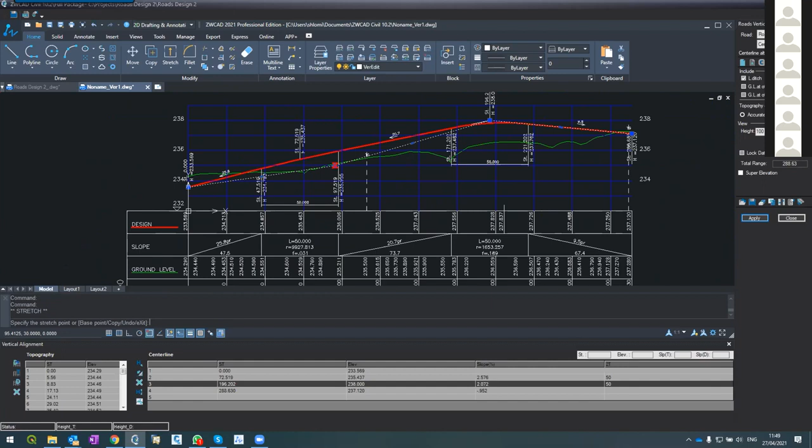Now there's no problem, we can continue. If, for example, I want to change this from here to here, apply. It's not a problem, I can do it. It's a BIM, so everything is associated. Or if I want this to be below, like maybe cutting, for a certain reason I want to cut here, actually to stick the ground here. Press OK. There's no problem.

So this is the way to do it. And you can see that all the associated data appears here. I hope you got it. So what I'm asking you to do is to take 5 minutes, do it by yourself, design your own road. Then I want to show you one last thing and we knock off for today.

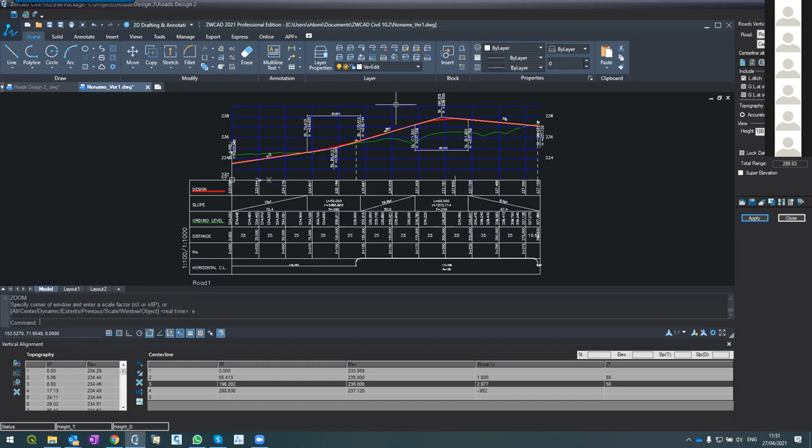So please. Hello Shlomi, yes, so I tried to reinstall the ZWCAD Civil. Before, the activation key that was given to me by Marina was working, but now it's not working. Let me share my screen. One second, I'm not seeing it. Somehow I don't know why I'm not seeing the screen. Maybe I have to stop sharing my own to see your screen. Yeah, but why did you reinstall the ZWCAD Civil? Because I cannot select ZWCAD 2021 as my working environment, so I downloaded the latest one uploaded last April I think. With this one I can select ZWCAD 2021 as my working environment, and now I cannot use the activation key anymore. Okay, I understand. Marina, please send it to him. I apologize. No problem, Marina please give him new keys. You already used this key for the phone. Okay, that's why, you'll get one very soon. Thank you, no problem. The rest of you, please...